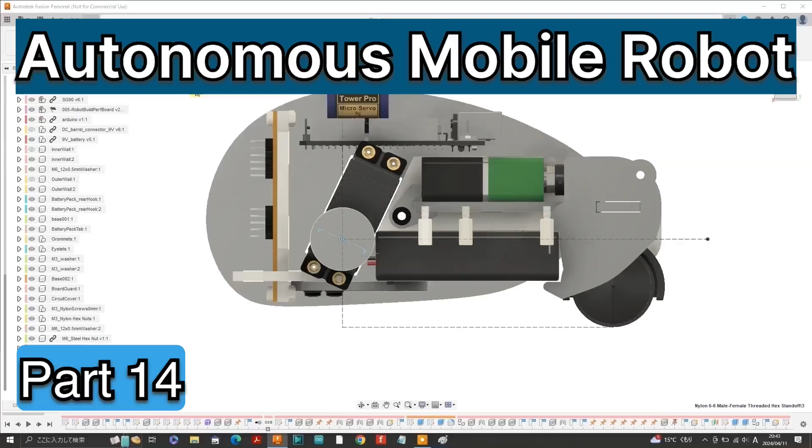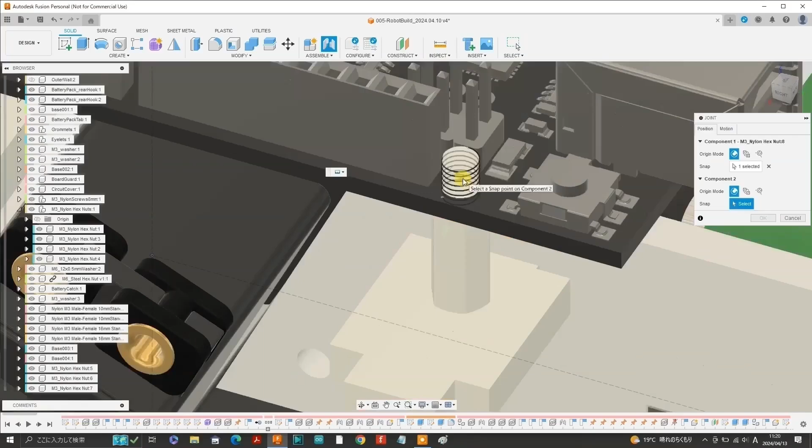Previously in part 13, using Fusion 360, we designed the mounting structure for the Arduino Uno and added a few holes in the chassis for M3 bolts to go through. Today in part 14, the chassis is really taking shape as we continue to make progress with the design and preparation for mounting the SG90 servo.

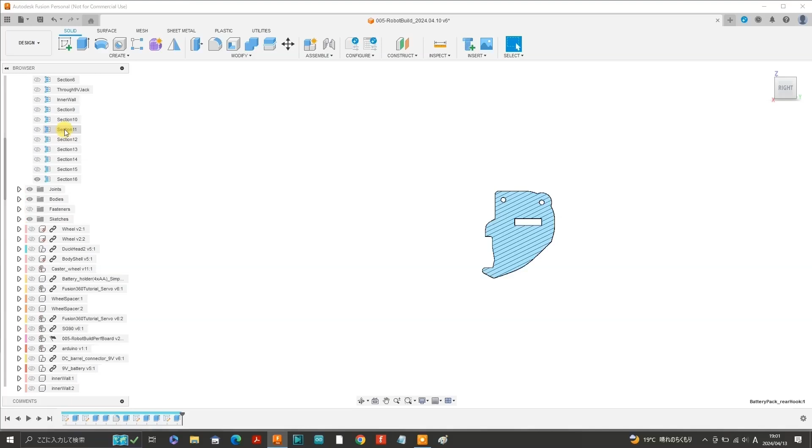Here I have switched on a section analysis through the longitudinal central plane, and we'll adjust that to 20 millimeters away from the central plane. Let's activate battery pack rear hook 1, right click and isolate it as well. Let's turn off the section analysis, select the outer face of the battery pack rear hook and create a new sketch. We'll need to select capture position before we carry on.

Press P to project and select the entire profile of the battery pack rear hook and hit OK. Unisolate battery pack rear hook 1 and hide the body shell.

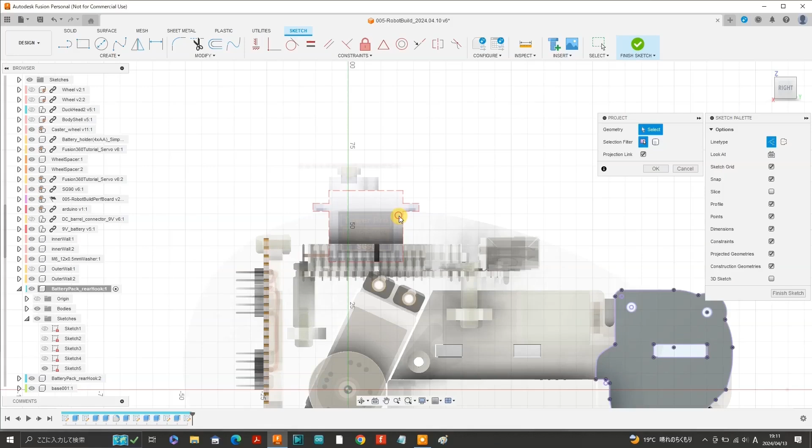Press P to project and project the body of the SG90 servo using the construction line type. Now let's project the upper part of the profile of the board guard and hit OK.

Here I have sketched a vertical construction line from a rear point at the top of the projected board guard part. Next, sketch a 10mm solid line parallel to the 14mm construction line and use the dimension tool to separate the 10mm line from the 14mm line by 0.2mm.

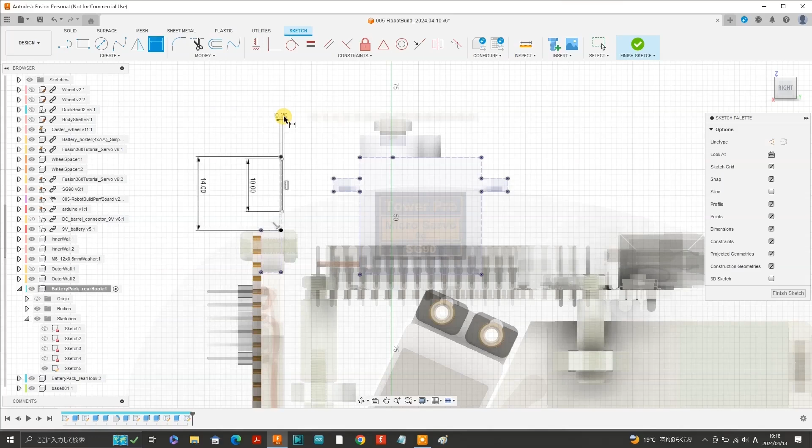Sketch an arbitrary horizontal line and give it a length of 52mm. Then use the coincident tool to align the 52mm line segment with the top end of the 10mm vertical line segment. Now let's use the fit point spline tool and sketch a curve from the right end of the 52mm line segment down to this projected point on the body that we have already designed.

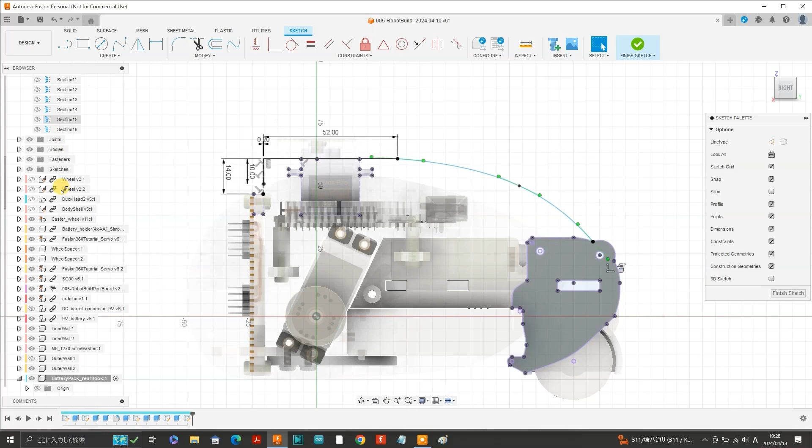Unhide the body shell and turn on the section analysis as a guide. That 52mm line segment looks to be a bit too long, so let's change that dimension to 45mm. The curved line is extending through the body shell, so let's adjust that. This fit point coincides with the body shell, so let's hide the body shell.

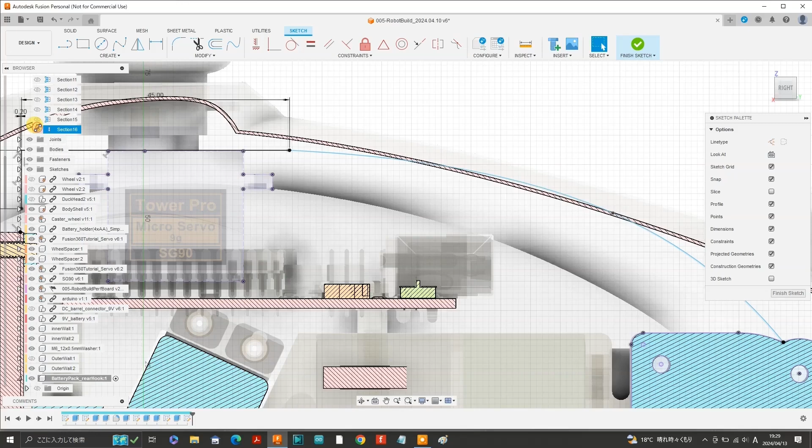I'm not sure why I turned off the section analysis in the footage though. Right click on the fit point and select move copy, upon which vertical, horizontal and planar manipulators appear. I selected the square planar manipulator and moved the fit point in downward and leftward directions. Then we can select and move other parts of the curved line to adjust the shape.

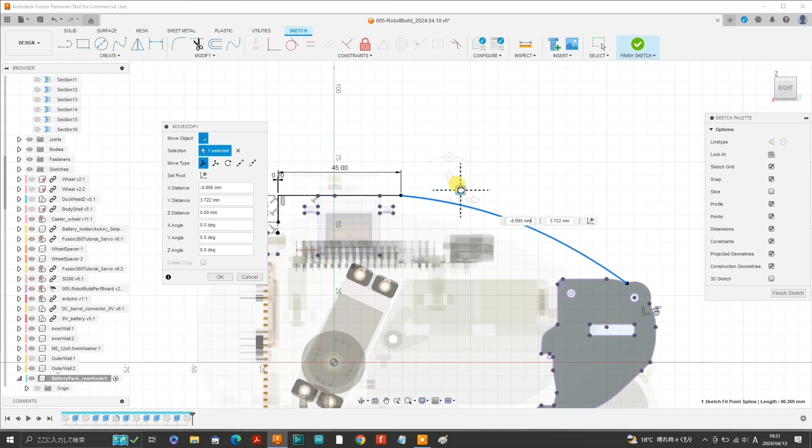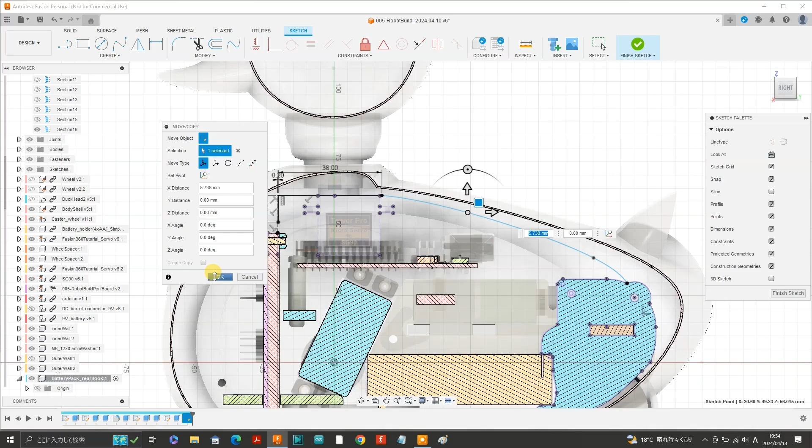Switch on the section analysis again and unhide the body shell. I decided to shorten the 45mm horizontal line segment down to 38mm, and I reshaped the curved line by right-clicking at a desired position on the curve and using Move Copy to reshape the curve. I finalized on this shape, so let's finish sketch.

Activate the main design and we can hide the body shell. The latest sketch, sketch 5, for the battery pack rear hook is not constrained, so let's right-click and edit it. Here I have completed sketching the basic profile of the battery pack rear hook, but it is still not constrained because of the curved line.

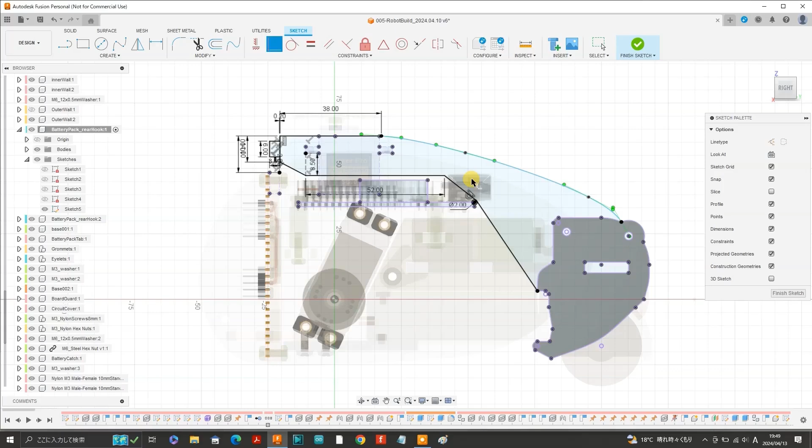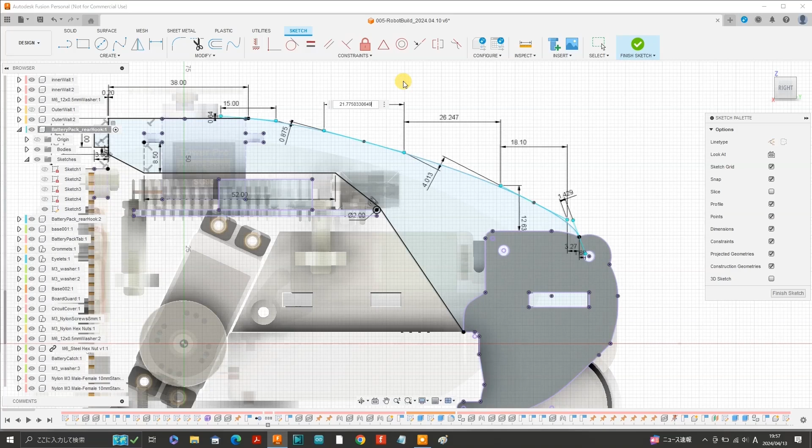So grab the dimension tool and dimension the ends of each handle on the curved line that was sketched using the fit point spline tool. I didn't change the dimensions much, just rounded the numbers a bit. Once you get the initial vertical and horizontal dimensions set, you can easily dimension the remaining handles like this. And there we can see that the curved line is black, meaning that the curved line is fully constrained.

Finish sketch, select the portions of the entire profile, including the original shape, and extrude by -3.7mm. Make sure the operation is set to join before hitting OK.

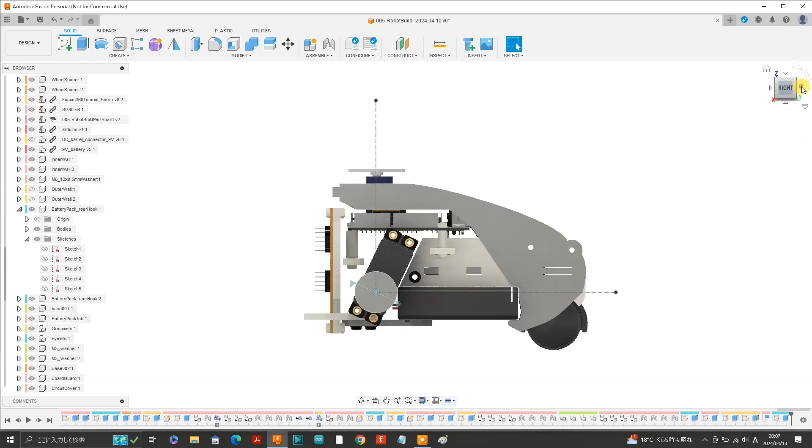We have a problem with the battery pack rear hook 2 because it is an exact copy of battery pack rear hook 1. However, the design of Arduino Uno is not symmetrical, so that battery pack rear hook 2 interferes with the AC adapter jack connector.

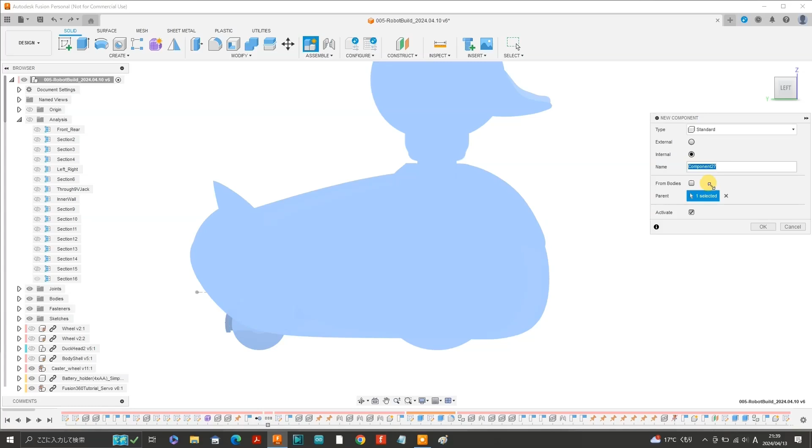So let's make a new battery pack rear hook by first creating a new component. Label the new component battery pack rear hook 3. Select the outer face of battery pack rear hook 2 and create a new sketch. Press P to project. Select the outer face of battery pack rear hook 2 and hit OK. Finish sketch. Now let's extrude the projected shape by -3.7mm and hit OK.

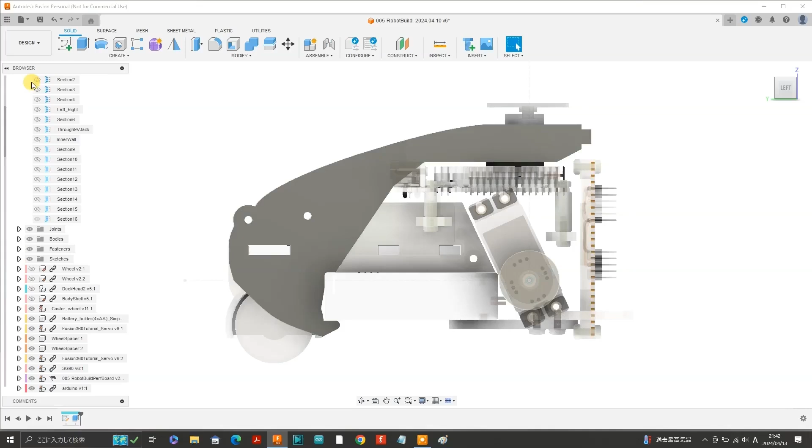Now we can modify battery pack rear hook 3 without affecting battery pack rear hook 1. Activate the main design. Go down to the sketch of battery pack rear hook 3 on the browser and edit sketch. Press P to project. Project the top and rear end of the USB Type-B connector on the Arduino Uno and hit OK.

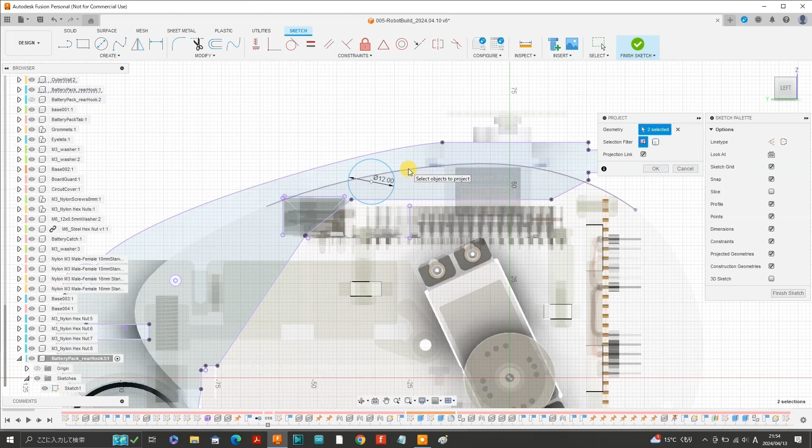Select the circle tool and create a new 12mm circle at a random location. Press P to project, and project the upper edge of outer wall 2. Hit OK. We want this circle approximately tangent with the upper edge of outer wall 2.

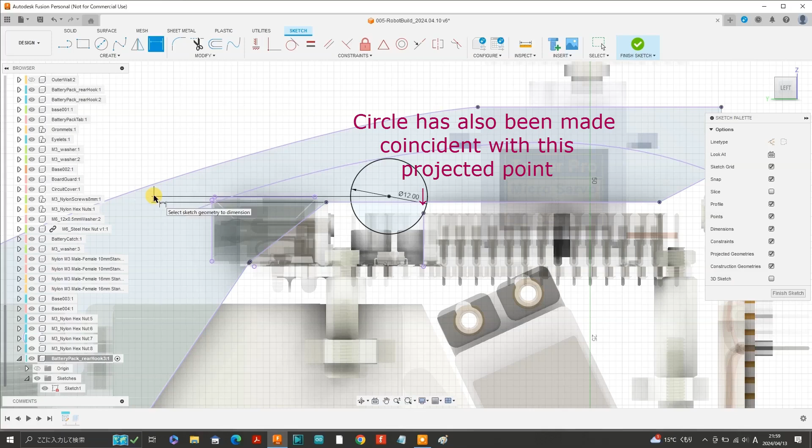Right-click on the circle and select Move Copy, then move the circle so it becomes approximately tangent to the upper edge of outer wall 2. Next, grab a dimension tool and add a vertical dimension from the straight edge, setting it to 0.9mm. Now the circle is constrained.

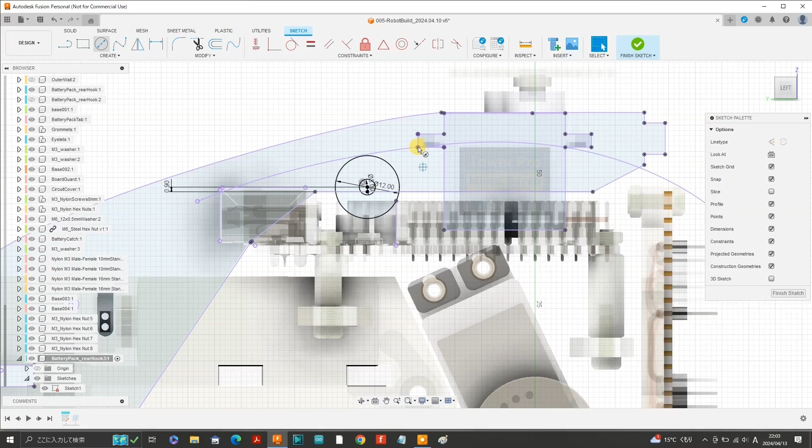Let's sketch a small construction line down to the straight edge, then sketch a 3mm diameter circle at the center of the 12mm diameter circle. Press P to project, hide battery pack rear hook 2 so we can project the profile of the SG90 servo, and hit OK. Grab the circle tool and sketch an 8mm circle centered at the lower outer corner of the projected mount of the SG90.

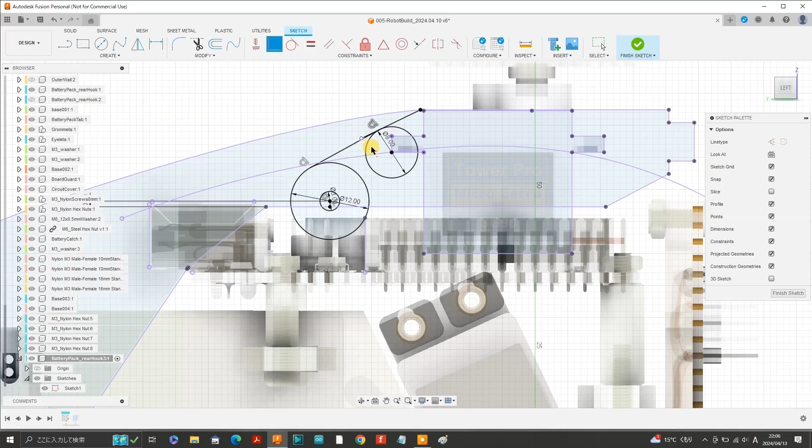Select the line tool and sketch a line close to the two circles. Make the line tangent to each circle and the respective ends coincident with the respective circles. Next, sketch a straight line from a rear point of the upper straight edge to an arbitrary position. Make this line tangent to the 8mm diameter circle and make its end point coincident with the 8mm circle. Okay, finish sketch.

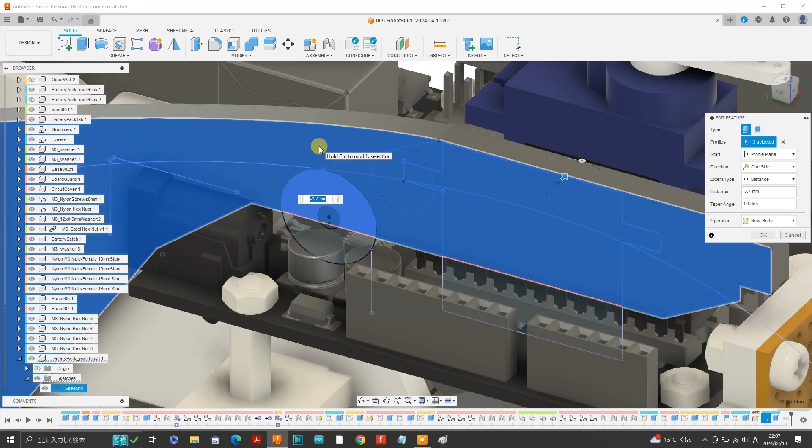Now let's go back to where we extruded battery pack rear hook 3 on the timeline. Right-click on the extrude icon and select Edit Feature. Initially we'll concentrate on the top portion and remove the remaining parts. The previously extruded portions disappear when selected, and the new portions become part of the new body. So this is the new upper part of battery pack rear hook 3, which could be renamed SG90 support wall, but I just left it as it was.

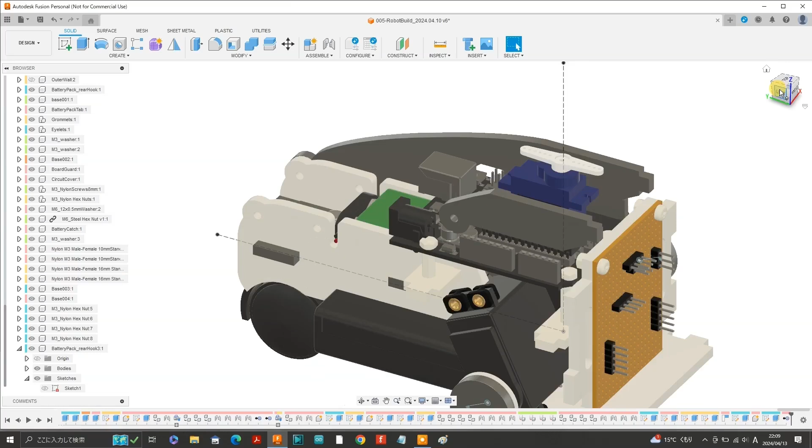Hit OK. For better visibility, let's color this component white by pressing A and dragging a white pigment onto it. Now we can go back to the sketch of battery pack rear hook 3 and edit it. I'll adjust the vertical position of the 12mm circle from 0.9mm to 3mm and finish the sketch.

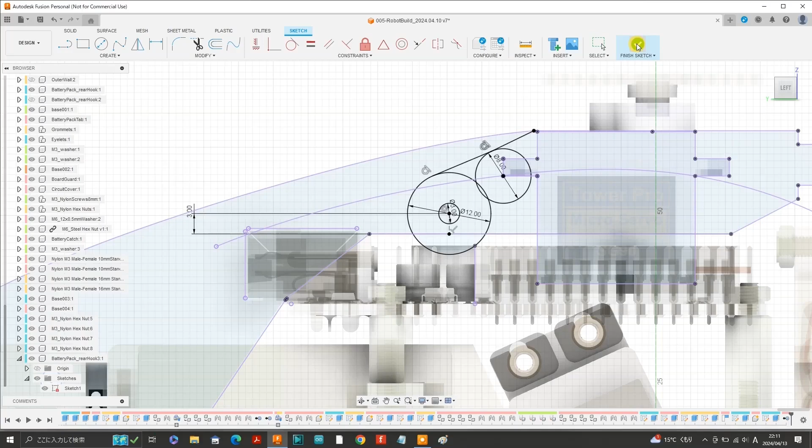It looks as though the 3mm diameter hole has disappeared, so let's edit the extrude feature from the timeline again and select inside the 3mm diameter hole, which automatically extrudes the hole. Hide the sketch to see how it looks.

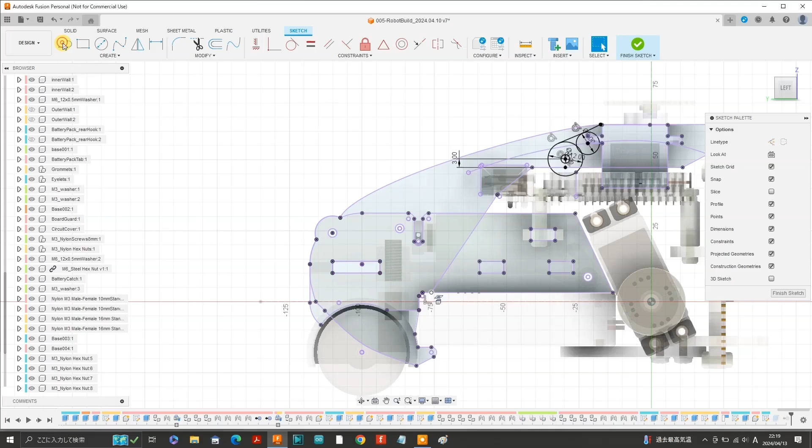Unhide the sketch for battery pack rear hook 3, edit the sketch, press P to project, project the entire profile of the inner wall, and hit OK. Grab the line tool and sketch a vertical line from this projected point.

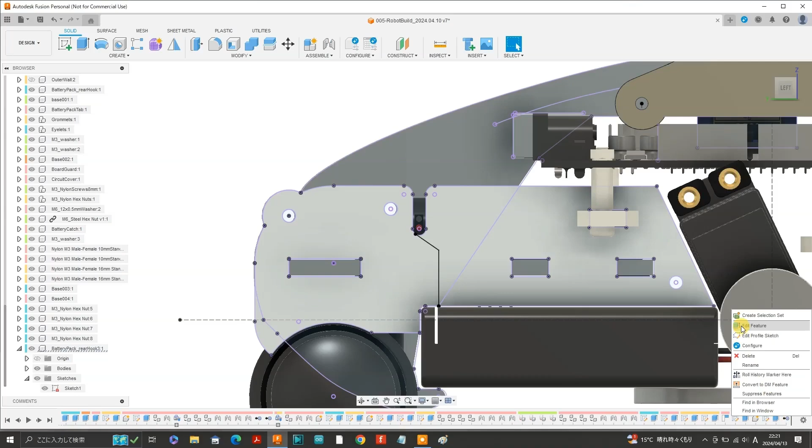Then sketch a line segment at an arbitrary angle below the semicircle at the end of the slot. Make the line segment tangent to the semicircle, then make the end of the line segment coincident with the semicircle. Finish sketch. Now let's go back to the timeline, edit the extrude feature again, and select the portions we'll need for the battery pack rear hook.

Hide the sketch for battery pack rear hook 3, press A for appearance, and apply a black pigment onto each part of battery pack rear hook 3 and also battery pack rear hook 1. It's probably a good idea to increase the area here to give a little more strength.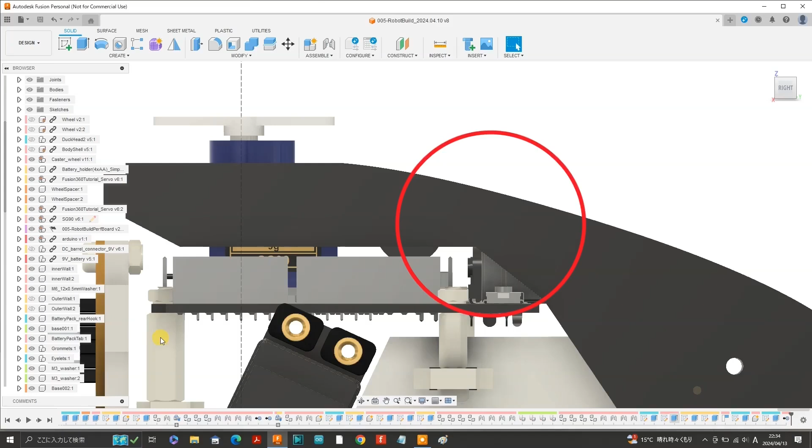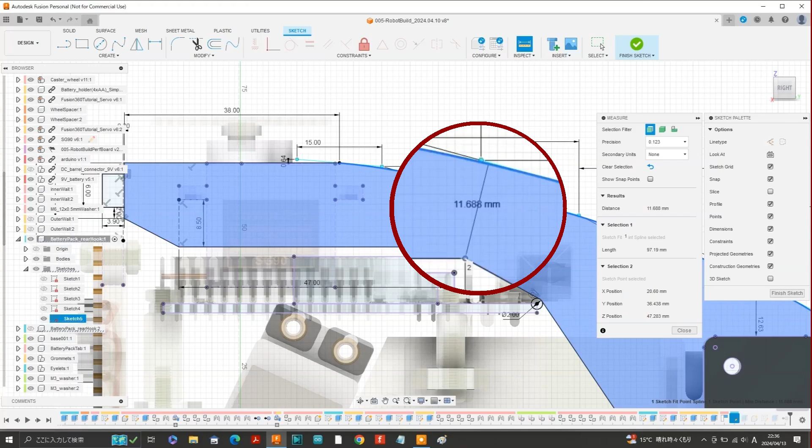So let's edit sketch 5 of battery pack rear hook 1 and modify this dimension from 52mm to 47mm. Using measure from inspect, we can find the shortest distance from the inner corner to the outer profile, which is approximately 11.7mm, which should be fine. Finish sketch and hide sketch 5.

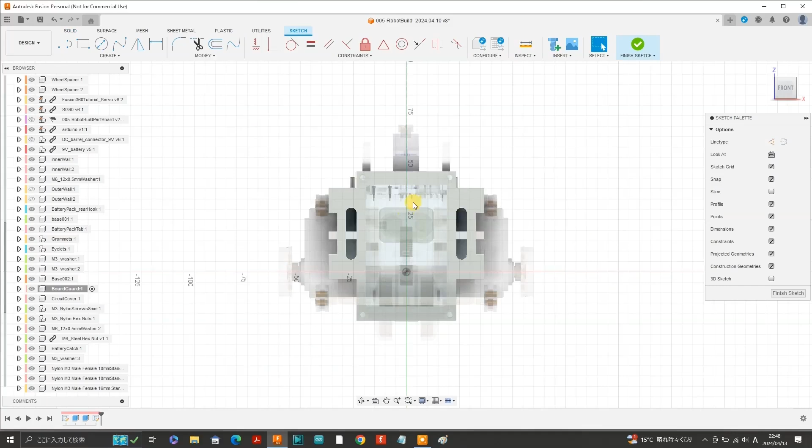Now we go to the front view of the design, hide the circuit board or perf board, go to the board guard in the browser and activate it. Select the entire front face of the board guard and create a new sketch. Press P to project, and project the front ends of the protrusions of battery pack rear hooks 1 and 3.

Select the circle tool and sketch a 5.8mm circle at each upper corner of the two projected rectangles. Sketch a horizontal line slightly above one set of the two circles. Use the tangent tool to make this line segment tangent to the two circles, and use the coincident tool to make each end coincident with each circle. Do the same for the set of two circles on the right side as well.

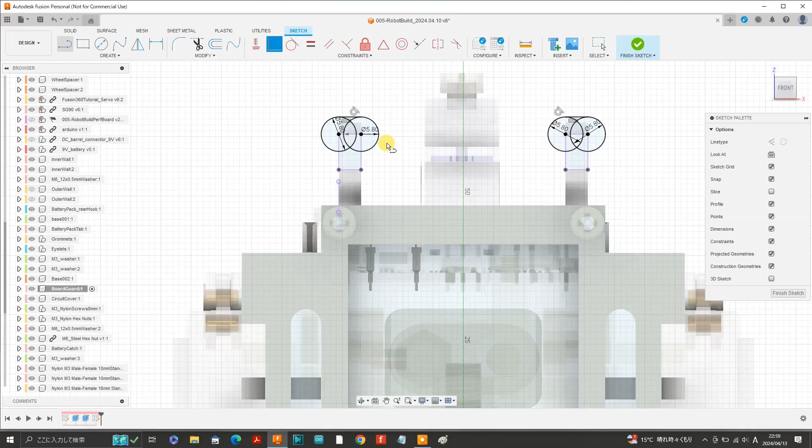Select the line tool again and sketch a vertical line next to one of the circles. Before we carry on, we should project the entire profile of the board guard.

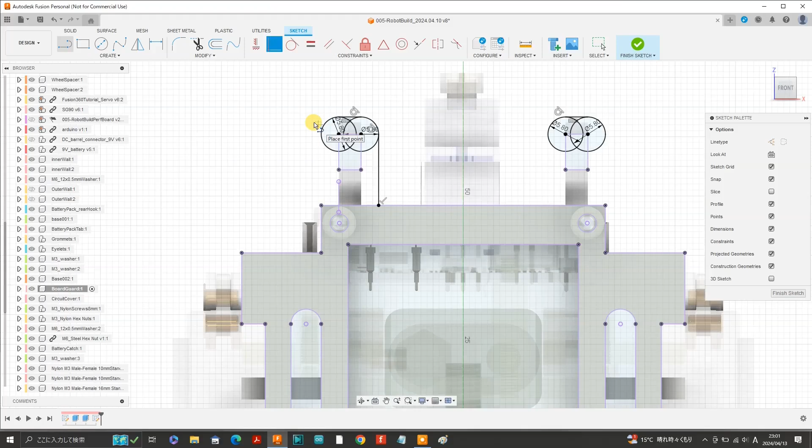Now grab the tangent tool and make the vertical line segment tangent to the neighboring circle, then use the coincident tool to make the upper end of the vertical line segment coincident with the circle. You might not need to use the tangent tool or the coincident tool if the vertical line naturally snaps into place and constrains itself. Now we just need to give a little clearance around each rectangle.

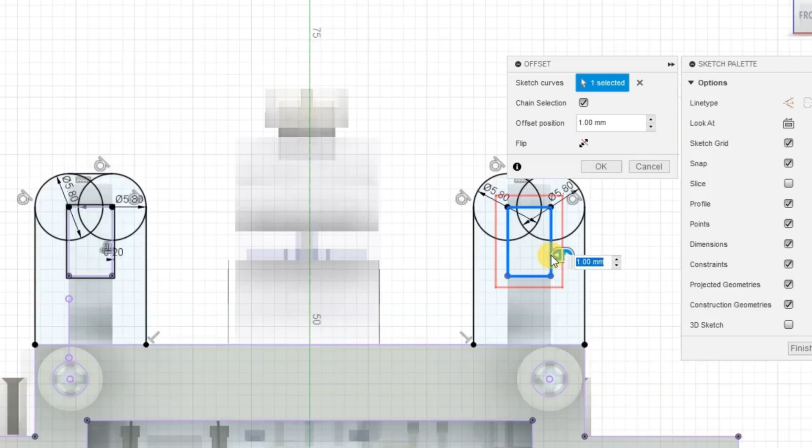I have already sketched out a slightly larger rectangle on the left side in the footage, so let's do the rectangle on the right side by selecting offset, selecting the right rectangle, and applying an offset value of 1 millimeter.

I decided to use the trim tool to remove part of the circles while being careful not to remove too much, otherwise the sketch would become unconstrained.

Finish sketch. Then extrude by 3.7 millimeters all the portions that form each loop support to be integrated with the rest of the board guard.

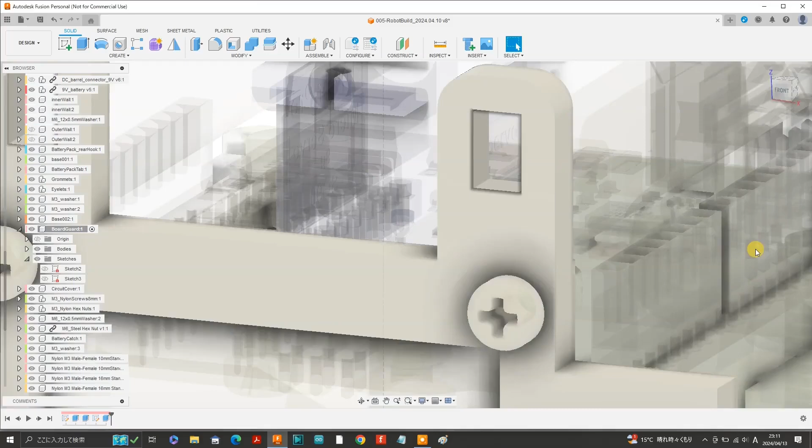Activate the main design. Let's unhide the perf board circuit and also outer wall 1 and 2. And there we have each battery pack rear hook inserted into the board guard, with battery pack rear hook 3 now comprising 2 separate bodies.

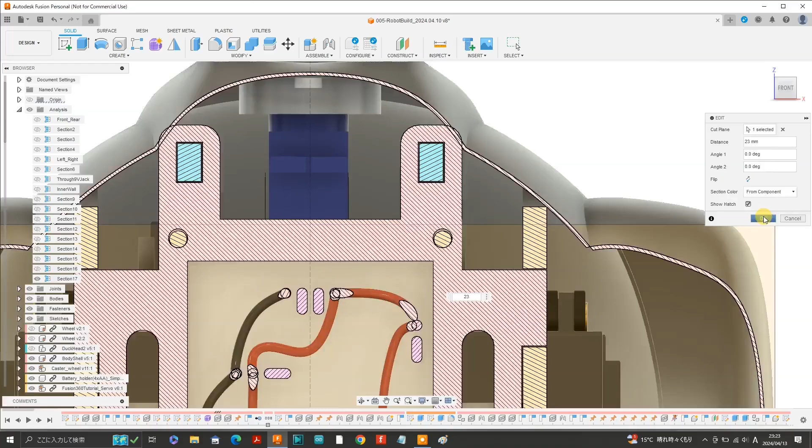Here I have done a section analysis through the board guard. As you can see, the left and right top support portions are actually penetrating through the body shell a little, so we'll need to fix that. Let's hide the outer walls again for visibility.

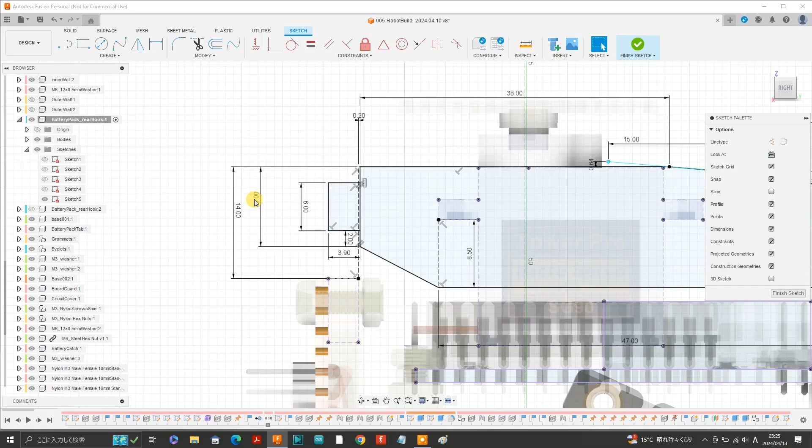Select sketch 5 of battery pack rear hook 1 and edit the sketch. Now if I move the protrusion down a bit, the corresponding loop support on the board guard also should adjust itself downward. So change this vertical dimension from 10 millimeters to 12 millimeters, which moves the protrusion down by 2 millimeters.

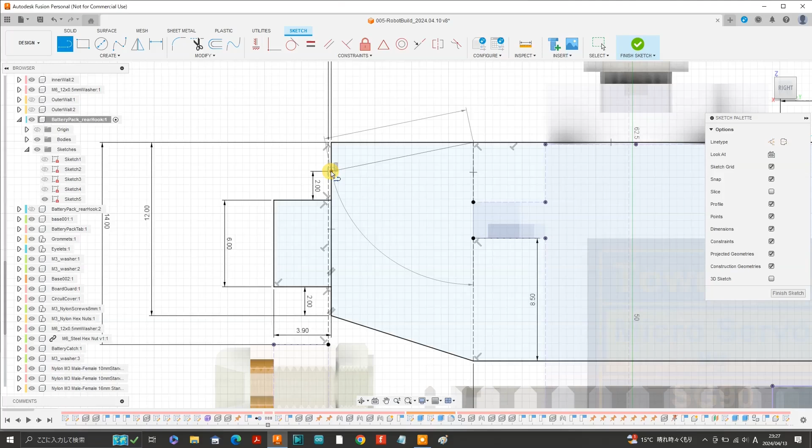Then use the line tool to sketch a slope that starts from the top portion of a vertical extension of a projected point of the SG90 servo mount, down to a position 2 millimeters above the top of the protrusion. Finish sketch and extrude by 3.7 millimeters to remove the excess portion.

Here we can see that the height of the loop support on the right is lower than the loop support on the left. Do the same to battery pack rear hook 2 on the other side.

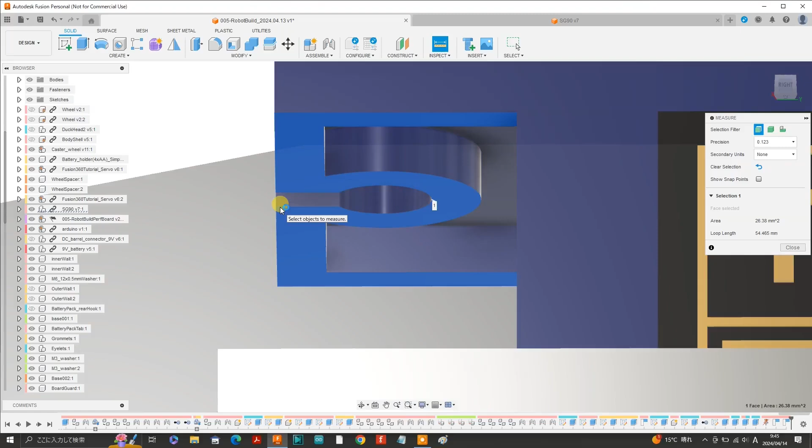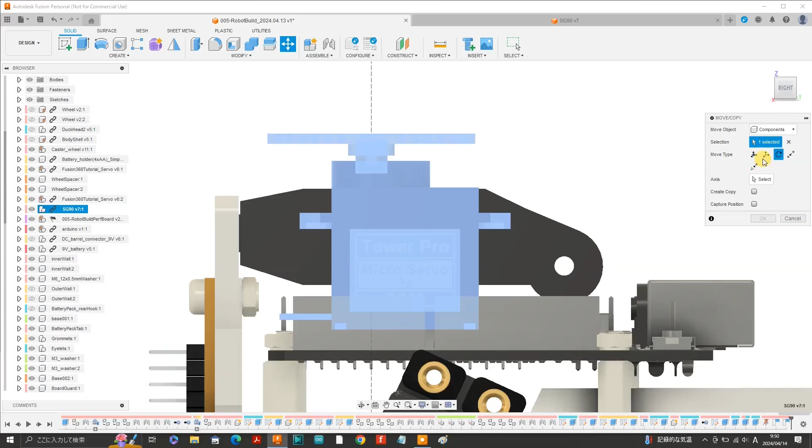We might make a slight positional adjustment for the SG90 servo, so select the SG90 in the browser and select the Move Copy tool. Change the move type to Free Move and move the SG90 upward by 0.021 millimeters so that the distance between the underside of each mount and the top of each battery pack rear hook becomes 6.3 millimeters.

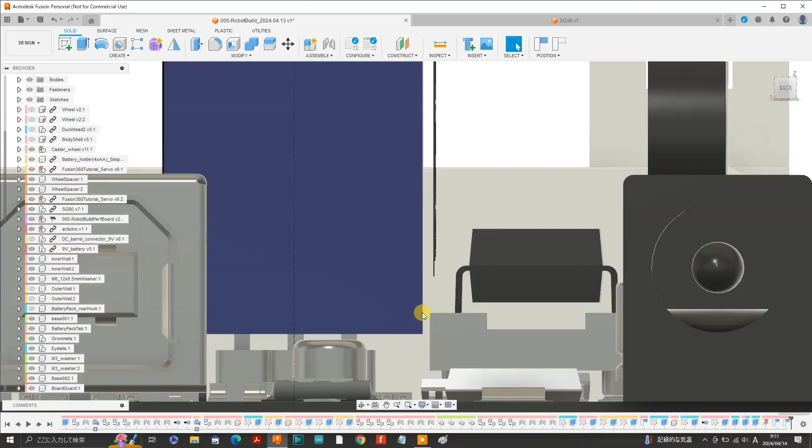As you can see, the bottom of the SG90 is very close to the IC socket on the Arduino, but it does not overlap. I ended up moving the SG90 servo up by a further 0.2 millimeters.

Here's a longitudinal section view. As you can see, the design around the neck region needs a bit of work, but we'll attend to that matter later. I decided to enlarge the upper portion of battery pack rear hook 3 to facilitate the mounting of the SG90.

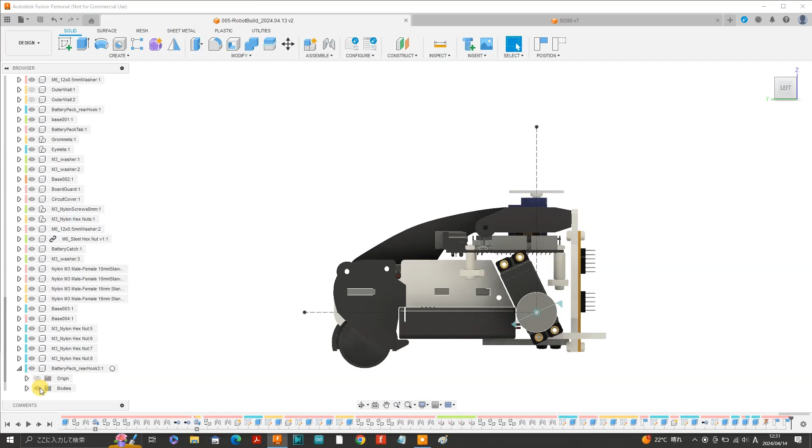So edit the sketch, and the first thing we'll do is delete the constraint by which the center of the 8mm diameter circle is constrained.

Let's also delete this inclined line segment by right-clicking and deleting it. Since the 8mm diameter circle is not constrained, we can easily drag it back like this.

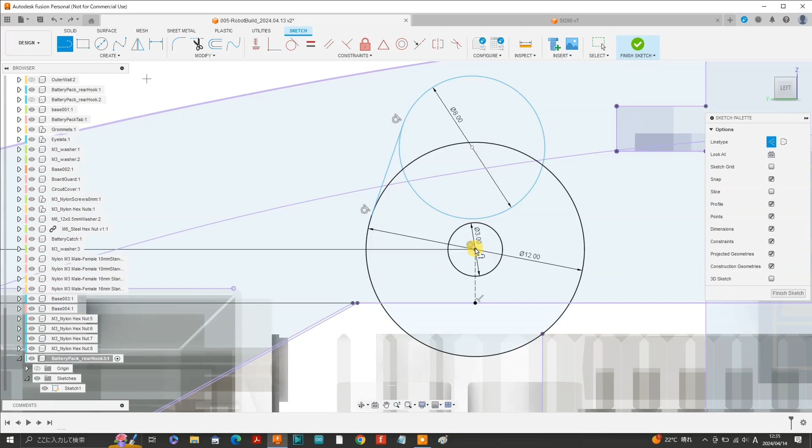Now select the line tool and sketch a vertical construction line from the center of the larger 12mm diameter circle up to the projected battery pack rear hook upper edge.

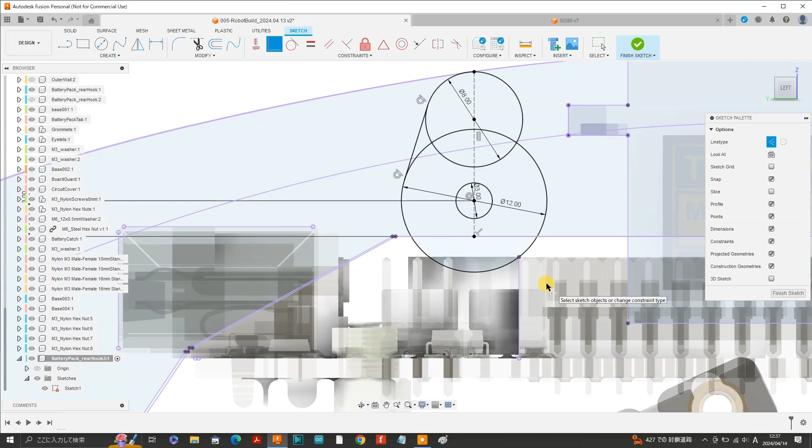Next, use the coincident tool to make the circle coincident with the end point of the vertical construction line, and then make the center of the circle coincident with the vertical construction line, thereby constraining the circle and the entire sketch.

Finish sketch. Now edit the extrude feature for battery pack rear hook 3 and select the newly modified portions to extrude. Make sure the extrude operation is set to join. Also, don't forget to cut the 3mm diameter hole as well.

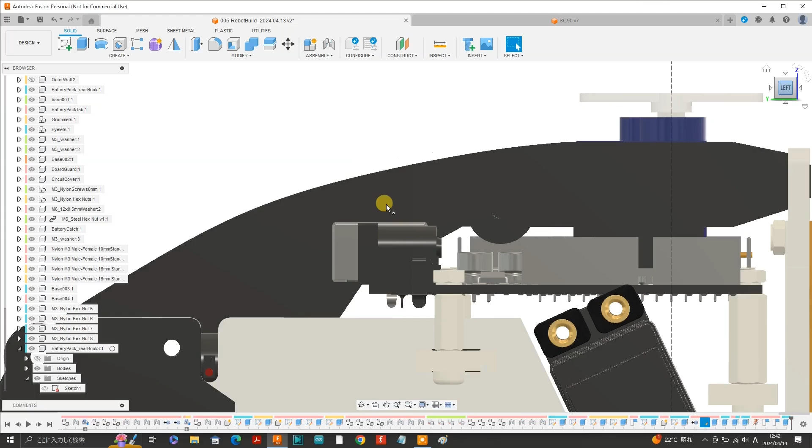Hit OK. Hide the sketch. I might color the upper part white just to improve visibility and confirm the shape.

Well, it's just as well I did that because it looks as though I have extruded part of the projected servo as well. So I'll just edit the extrude feature again and cut off the excess portion.

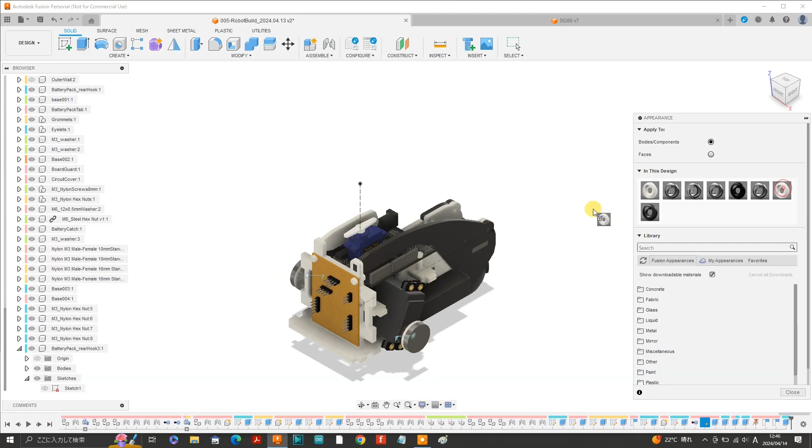Hide the sketch again and hit home. I might as well color battery pack rear hook 1 white as well, and also the lower part of battery pack rear hook 3. Now let's shift to the top view so that we can start designing an SG90 base for the SG90 servo to mount onto.